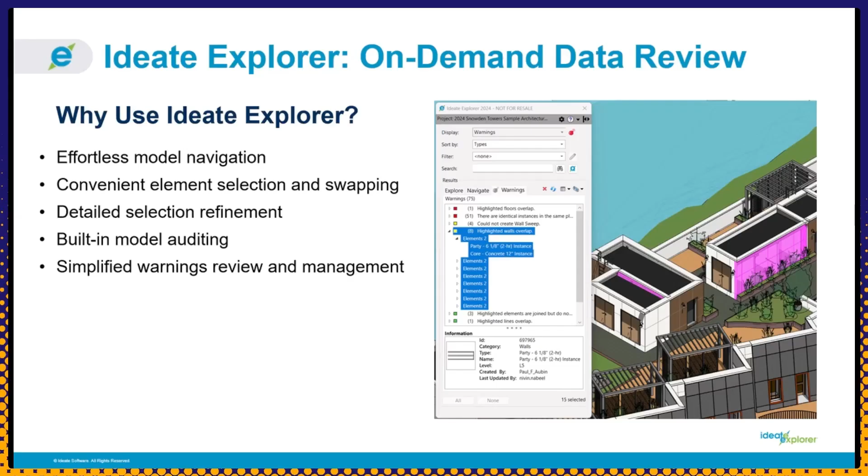The warnings are all ranked as well. They can be customized, so the most important warnings surface to the top and the least important warnings are pushed to the bottom. And the rankings are included in those Excel exports. As a BIM lead on my project at HOK, Ideate's query-based search helped me support my team's needs faster and gave us a lot more confidence in our models, really. And I will show you how that works in an upcoming demo.

Let's talk about Ideate Style Manager. So Ideate Explorer is really great for auditing model elements, but what about all the styles behind those elements, right? So in Revit, every 2D and 3D element is tied to things like object styles, line styles, materials, fill patterns, etc. And managing all of that manually can be a real mess. So that's where Ideate Style Manager comes in.

It gives you a clear view of where styles are used across your model and even within families. Once you identify what's in use, you can merge styles or delete unused styles, duplicate styles to align everything within your BIM standards. And so the result is a cleaner, more consistent Revit model that's easier to manage and share. We'll walk through how this works in just a bit, but know that Style Manager is a really good companion to Explorer when it comes to keeping your models under control.

Now let's talk about Ideate BIMlink. So BIMlink gives you the power to manage massive amounts of Revit data fast. It allows you to export parameters and properties to Excel, where it's much easier to review and make edits. And once you're done, you can push those changes right back into your Revit models seamlessly. So let's be honest here. Revit schedules are powerful, but they can't match the flexibility of Excel, as some of you can imagine.

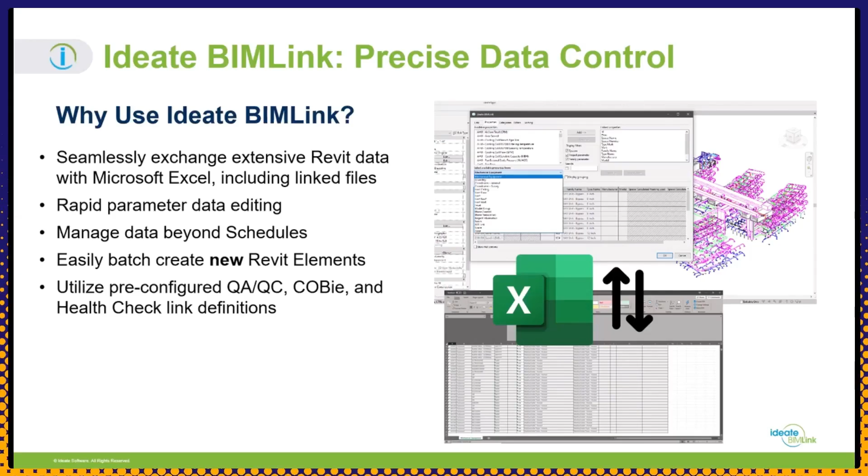Ideate Sticky. So Ideate Sticky lets you bring non-BIM data into Revit quickly and cleanly. It is different from BIMlink in the sense that it will not impact the elements in your model, but you can link Excel, Word, or PDF documents directly into your model while keeping their native formatting and visual fidelity intact. This is perfect for things like sheet specifications, code lists, code studies, notes, and any other reference info that needs to be visible and always up to date.

And instead of creating this content manually in Revit, Sticky keeps it synced and looking exactly how it should. It's a simple but really powerful way to ensure that critical non-BIM data stays a part of your project without breaking your workflows. And we'll show you how easy it is to set up during a demo.

Ideate apps. What are Ideate apps? Ideate apps are a collection of tools designed to handle the repetitive and time-consuming tasks we all face in Revit, right? So instead of spending hours on things like renumbering, finding hidden elements, placing views on sheets, Ideate apps helps you do it a lot faster, a lot more accurately, and with a lot less frustration. It's made up of 10 focused tools, each one built to solve a specific pain point. So whether it's checking spelling, safely deleting elements, or managing views and sheets more efficiently, all of these tools are built to help you with those tasks.

The real power here is how much time and energy you save across a project. It's not about working harder. It's about working smarter and making your Revit experience smoother every step of the way. So we'll show you a few of these tools live so you can see how much of a difference they can make in your regular workflows.

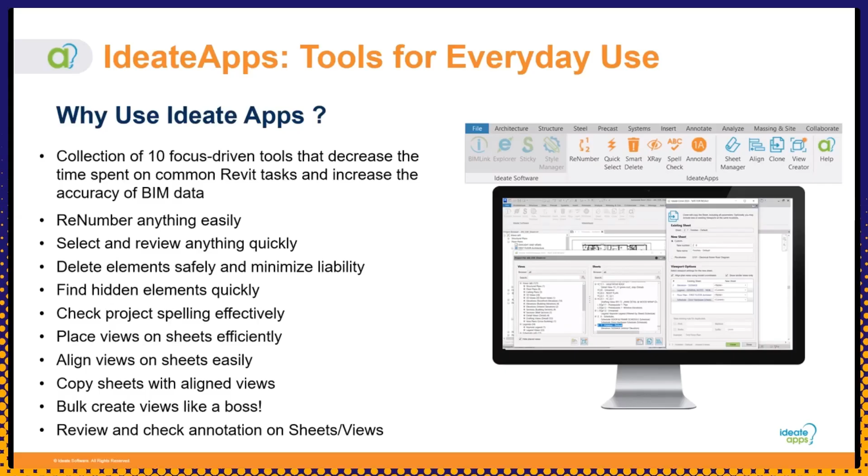Let's jump into some demos, starting with Ideate Explorer, and specifically how it can help with navigating through your model. Ideate Explorer provides you a high-level view of all the items within your Revit model, along with other helpful information like counts and properties. Additional filtering and sorting options at the top allow you to explore the model in a really detailed manner. So for example, you can choose to view everything in your model, narrow it down to the current view you're in, or create a list based on your current active selection.

For more precise control, you can layer on a sorting condition where you can organize items in the list by category, level, room, space, etc. And additionally, you can also apply Ideate's pre-built filters or custom filters that help you narrow down exactly what you want to see.

So in this example, we're going to look for a specific window in the project. And by expanding the list, we can narrow down to a specific type of instance, and double-clicking the instance will open a view showing the element.

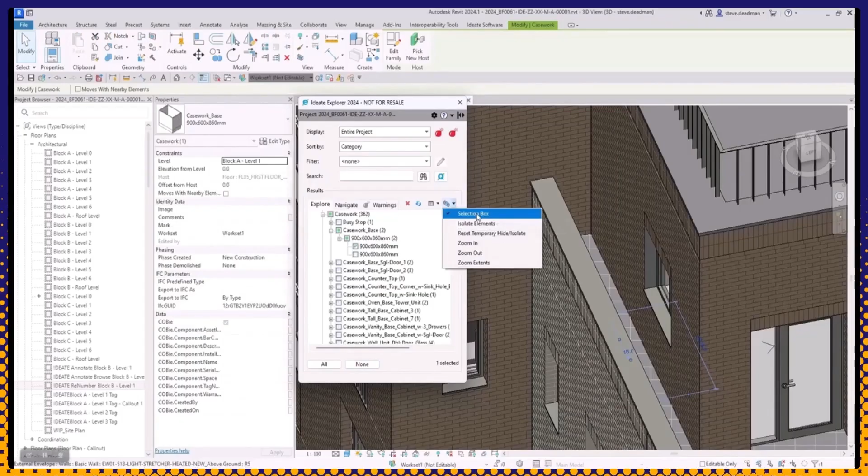In this case, we are looking for a specific piece of casework in the model. It's inside the model, so double-clicking on it will not show me the exact piece. But what I can do is I can create a section box around the item. So it'll actually create a specific view that is cropped to see exactly what you want to see. It's a super easy way of narrowing down your view without spending time searching for a specific item.

Let's look at how you can leverage one of Ideate's built-in filters. With Ideate Explorer open, I start by selecting the pre-built Ideate Audit filter. We can see that in the list, there are items that may be impacting the performance of your model, such as CAD and PDF imports, lines and groups, etc. Let's look at a specific import that seems to have been brought in twice in the model. So in this case, it will be a CAD import.

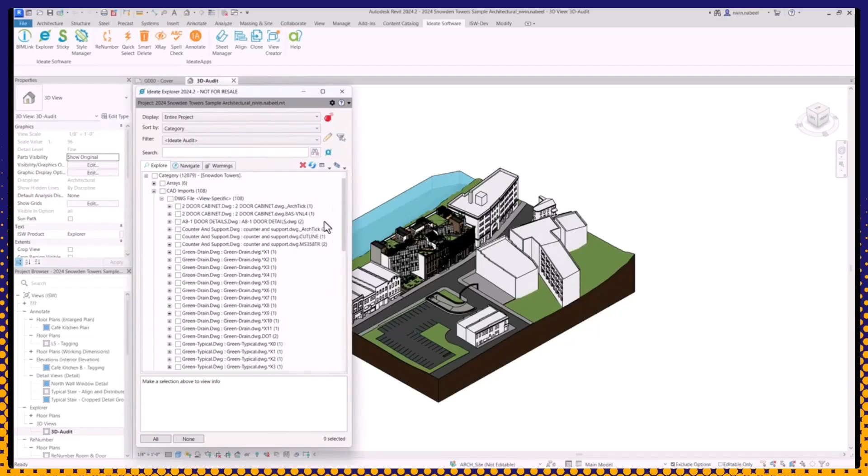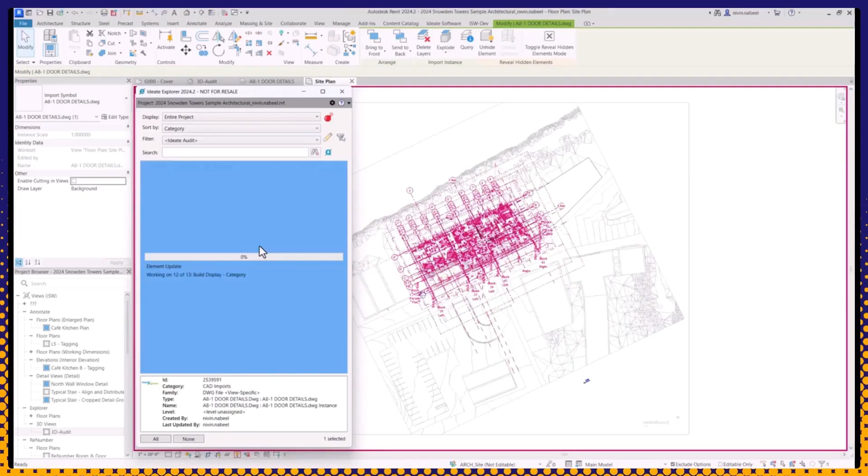On expanding the import, you can see that there are two instances in the model. So by double-clicking the first, it opens a view where the import has been placed. There's nothing special here. So let's look at the second import and see where it has been placed. And it looks like this element has been hidden. Ideate Explorer will actually go to the view and unhide the element for you. And there you go. It looks like the DWG has been imported in the site plan.

And at this point, you can click on Ideate Query to investigate more details about the instance and search for specific properties of that instance. So for example, you can look for who has created that particular instance, and it'll give you more insight into that specific element.

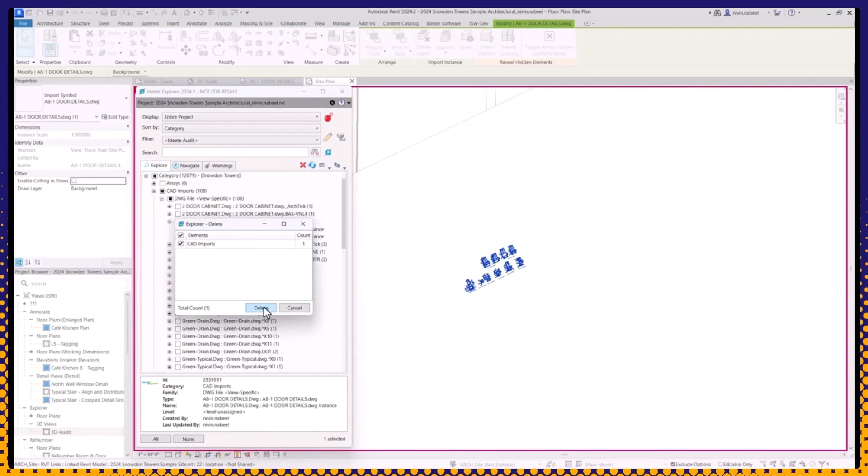You can also view groups in the Explorer as part of the list of items that can be audited. Really helpful in an example where detail lines are used within a group. By checking the box next to the instance in Explorer, you can select all the instances of the group in the model. And upon editing the group, you can choose to use a detail component instead of detail lines.

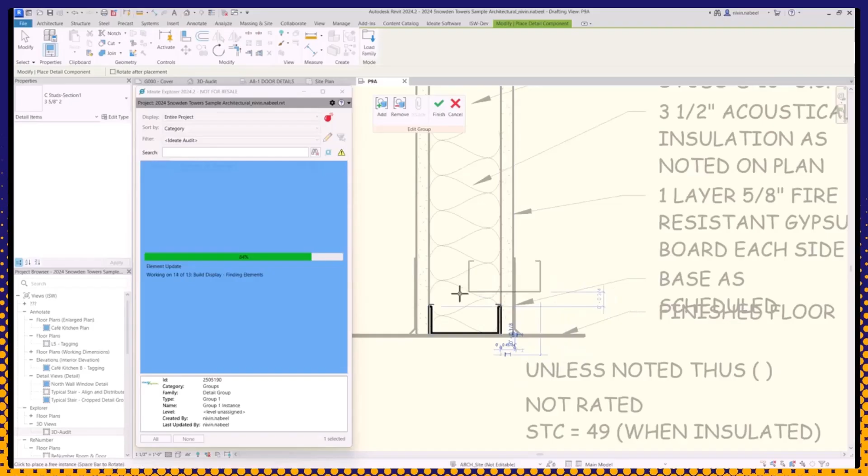So I'm going to go ahead and double click this particular group and replace it with a detail component. And once you place the component, of course, you can go ahead and delete those lines. And once saved, you can see that the group has been updated everywhere. And so again, this is a quick and easy way of trying to clean up your model versus an ad hoc exploration of the model to fix issues.

Let's talk about lines really quickly. Ideate Explorer groups line types and instances into detail lines and model lines. Again, you can see the line type and count in Explorer, and expanding a type will show you all the instances of the line in the model.

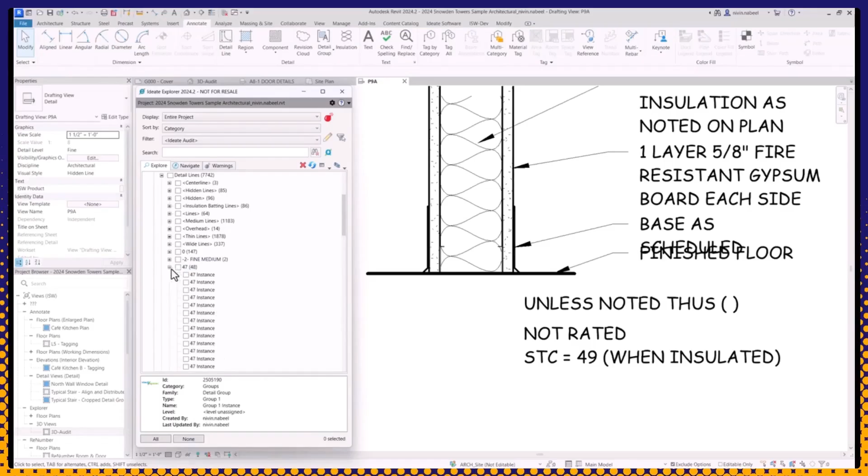So in this example, you can check the box next to the line type, and they actually get selected in the model. Similarly, you can also select other non-standard line types. So I've selected a couple here, and then you can change all of them into a specific line type that aligns with your business standards.

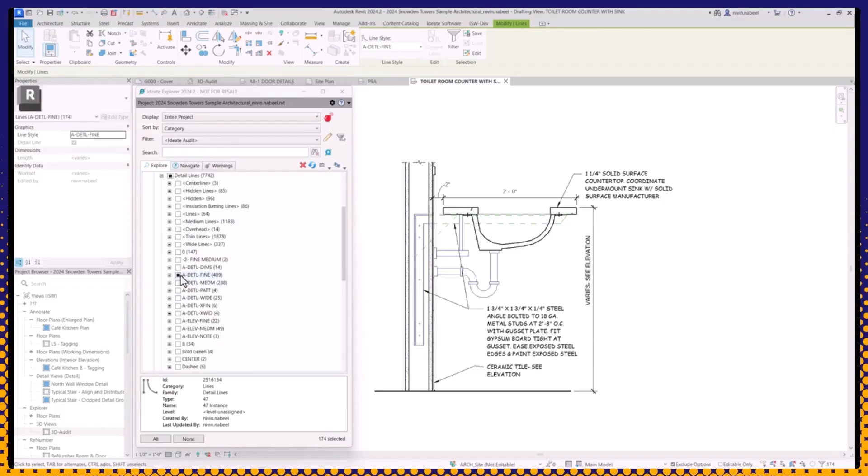Something that makes Explorer unique and powerful is dynamic filters. When you have Explorer open, you can see a list of everything that has been built in the model. So let's say as part of the model review, you want to look at in-place families only. With filters, you can narrow down the list to multi-category in-place families as shown here. You can see the different types of families in your model that match that criteria.

Now let's look at how the filter is set up. You can also create your own rules for the filter, by the way. On the list on the left, you can see the different categories of elements in the model, and several of them have been checked. You can also view and edit additional conditions on the right. And in this case, we are saying that the value of the Is In Place parameter is equal to true. Now, this is not a Revit property, which means that you can use custom parameters as filters as well.

Now, what can you do with this list? By checking all of them, you can now isolate the items and go through your cleanup or auditing or design process. You can quickly replicate instances within the model. And as you can see, the count against that item goes up in Explorer. So that's what we call dynamic filtering.

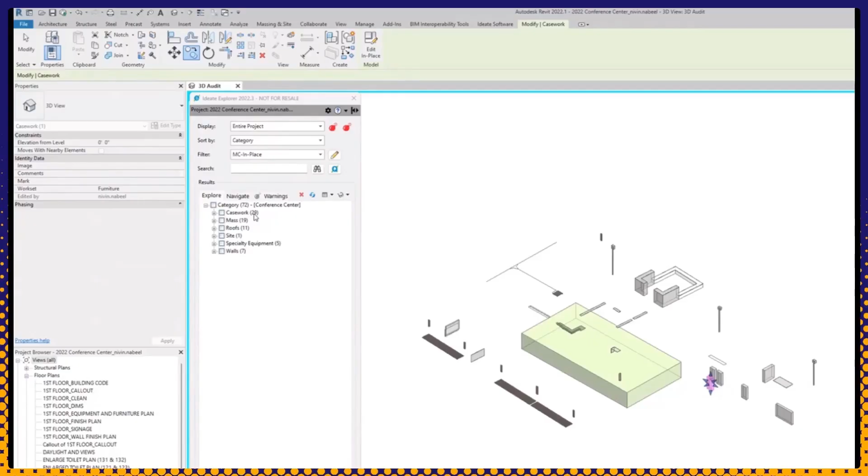Let's talk about how you can leverage sorting in Explorer now. So sorting is a powerful way to group model elements based on their properties, so things like worksets, levels, rooms, spaces, and more. Here is an example of items sorted by level.

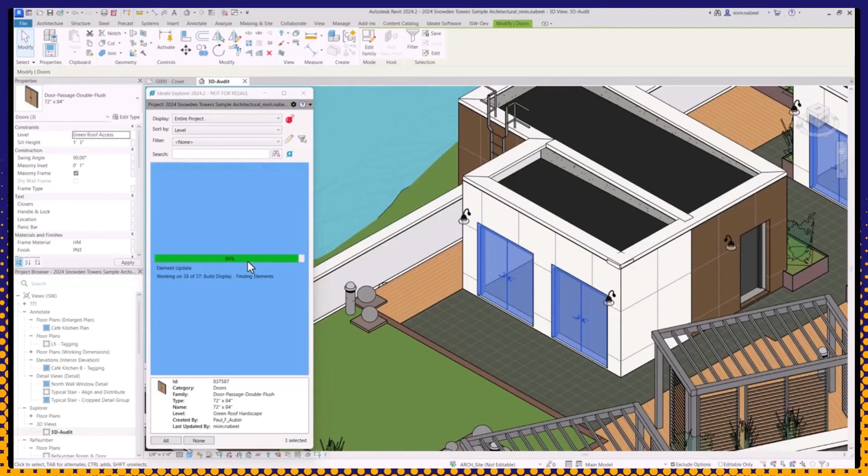So while looking through the list, you will note that there are doors that are not on the correct level. I know that there are no doors supposed to be on this level. So you can select them and quickly move them to the correct level from the properties drop-down menu. You can see how the doors have now moved down to the correct level.

Now, as an example of our tools and workflows working seamlessly together, sorting is particularly helpful when used along with filters. So for example, if your task is cleaning up worksets, you can first sort all the elements by worksets. In this case, you select the entire workset. The workset selection will be grayed out because you're selecting elements and groups that are non-editable.

When you layer on a pre-built multi-category editable workset filter, you can select the individual items within an editable workset, so you can move them to the appropriate workset. If you're trying to clean up your model and make sure everything is in the right workset, you can use Explorer with sorting and filtering to do this really quickly and accurately without having to navigate through the model and checking each element one at a time.

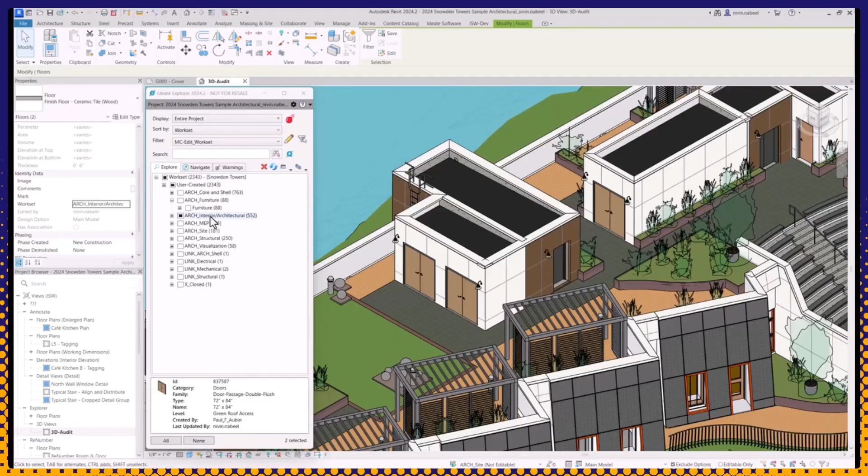One last example of Ideate Explorer is the Warnings Manager. The Warnings Manager is built into Ideate Explorer. The default Revit Warning Manager is pretty overwhelming, which is why we've built our own tool. With the Ideate Warning Manager, you can also customize the order in which warnings are listed and rank them however you want.

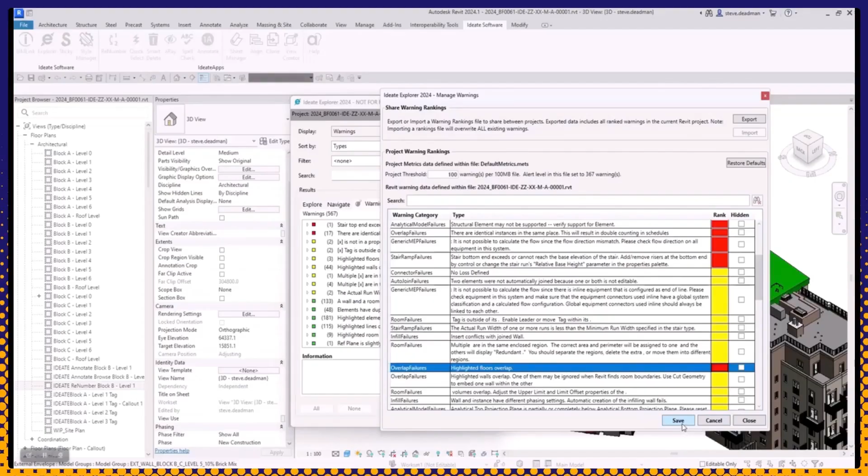So in this case, let's say you have a floor overlap, and you can manually toggle that to a high priority example. So I'm going to go ahead and scroll to that particular example and change the rank of that specific condition to high. And just as an example, that actually shows up in the Warnings Manager as well in Explorer.

Now let's look at the specific stair warning. You can choose the warning and create a section box around that specific element included in the warning. So you're viewing the issue in contextual detail, and you can then address the issue. So it really allows you to zoom into the problem area and take action based on what's happening in the model.

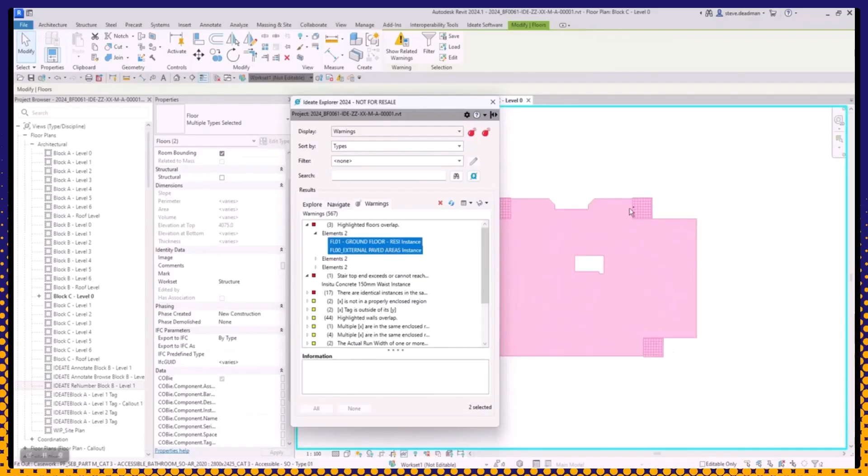Now, in this case of overlapping floors, Ideate will take you to a view that shows you the condition. With the elements then selected, you can isolate them, view the overlapping condition, address it in the active view, and then go back to the warnings list. And once you've updated that, the warnings list will be updated as well.

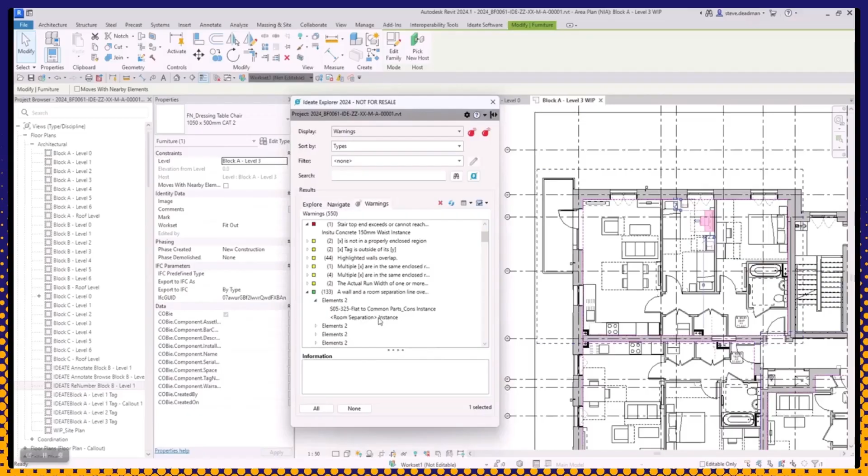Now let's look at another warning, which says that there are identical instances of elements in the same place. So it looks like someone may have accidentally copied a set of elements in the same location, creating an overlap. There may be annotations and tags associated with the original items, and you may not want to lose them. So Ideate will allow you to retain the original items or the latest items, making it easy to delete unnecessary copies. If you just discovered the issue, you can delete the latest elements and all the original elements and the other dependencies stay in place.

And in this case, we're looking at room separators, which can be really hard to find, especially if it's placed under a wall or location similar to that. So Ideate allows you to quickly locate and select the separators, and then you can modify them, saving you time and having to find them manually.

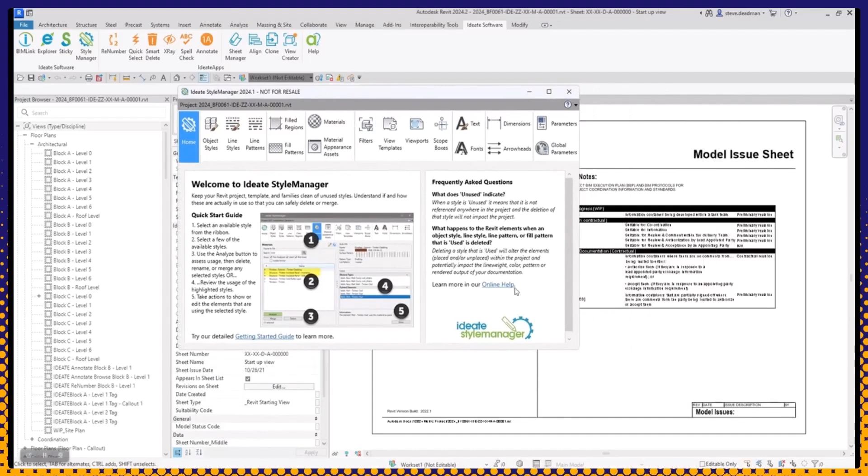The concept behind Style Manager is fairly straightforward. It is a hub that allows you to manage styles in the model across different items, things like objects, lines, patterns, regions, materials, etc. When you select a certain type of item, Style Manager shows you a list of all the different types under that item. Items that are colored are duplicates, in case you're wondering what those colors mean. Now let's, as an example, browse through line patterns.

One way to use this tool is to clean up imported CAD line patterns. You can see duplicated imported line patterns here.

To effectively use this tool, you must first analyze the items in the list. After you analyze an item, you'll see the count in the column on the left. If it says 0, the pattern isn't being used anywhere and is safe to delete. The tool allows you to safely identify items in use before you delete them.

Now in this example, you can see two patterns which look like they're the same pattern with different names. You can see what this pattern looks like on the right. When you select the items, it will list the locations where they're being used.

You can also merge patterns once you review the usage and have identified them as duplicates. When you click on merge, you can select the base pattern you want to keep, as you can see here. So now you can go back to the merged pattern and rename it to match your project or BIM standards and make it easily identifiable.

You can also analyze materials being used in the project. On analyzing a material, you can see a lot of information right in the window, like style info and where the material is being used. You can also analyze and merge materials using Style Manager this way.

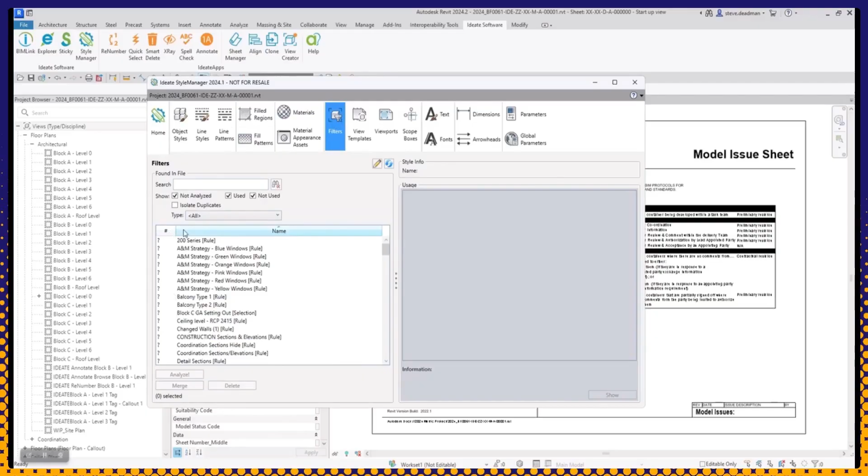Style Manager also works the same way with filters. You can identify where filters are being used and quickly audit which filters are redundant and can be deleted.

Style Manager can also help you with family and project parameters. When you fire up the tool, the tab is available on the right-hand side of the window. On clicking it, the tool reviews parameters in project title blocks first, because they're in labels and are hard to find.

You can access the search bar at the top, or narrow down the parameters based on whether they're project or shared parameters. You can also highlight and isolate duplicates, analyze them, and then delete them if needed.

Now, in this example, I'm trying to search for a specific parameter called acoustic rating using the search bar at the top. On clicking Analyze, the tool will list all the details of the parameter. But you'll notice that while there are no instances found, there's also a question mark in the count.

That's because the initial analysis is quick. You can choose to run a deeper analysis as well and take it a step further to analyze the use of the parameters within schedules and title block families.

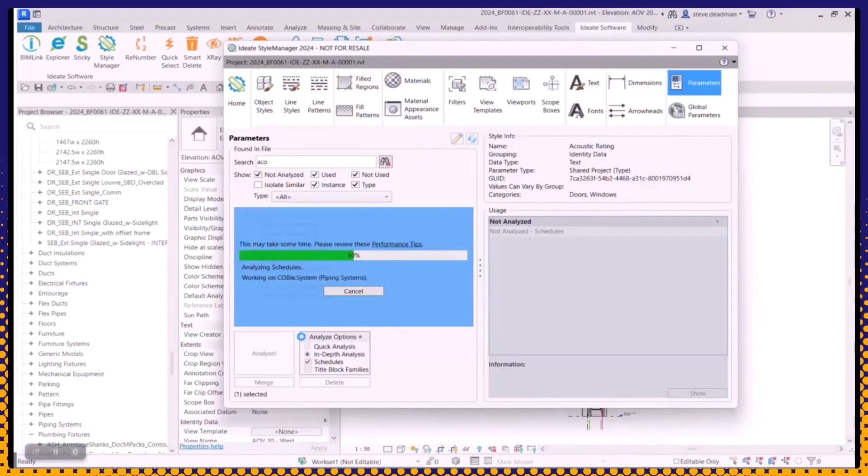Now, when those options are checked, you can see it takes slightly longer for the analysis to run, but Style Manager is able to pull up the schedules where the parameter is being used within a family.

Now let's clear the search and browse through the list for some duplicates. I'm going to analyze these two parameters that are duplicates, and when I do it, you can see that the first parameter is in use in two locations, but the second one is not.

Style Manager also provides you with additional context about the usage, so you can see where the parameter is being used. Once you've reviewed all this information, you can safely delete this parameter, knowing that it will not affect anything else in the model.

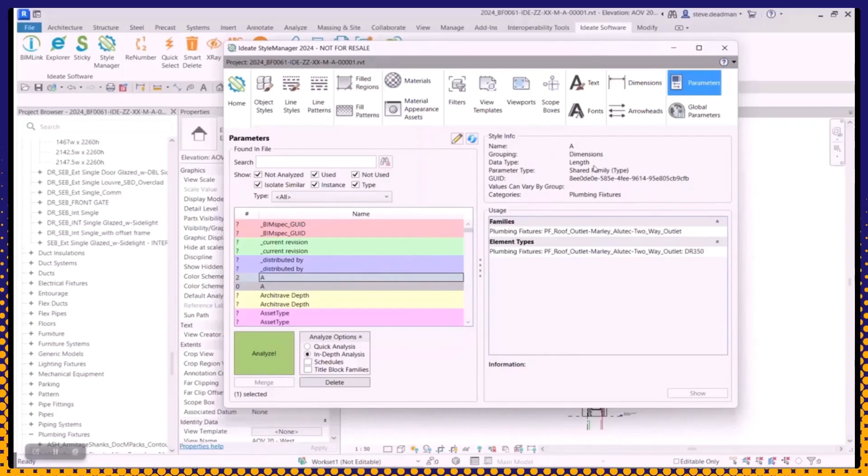Moving on to the next tool, which is Ideate BIMlink.

BIMlink is a powerful tool that allows you to export data from Revit to easily manage and edit properties and parameters in large sets. Think door schedules, wall types, sheets, and the like.

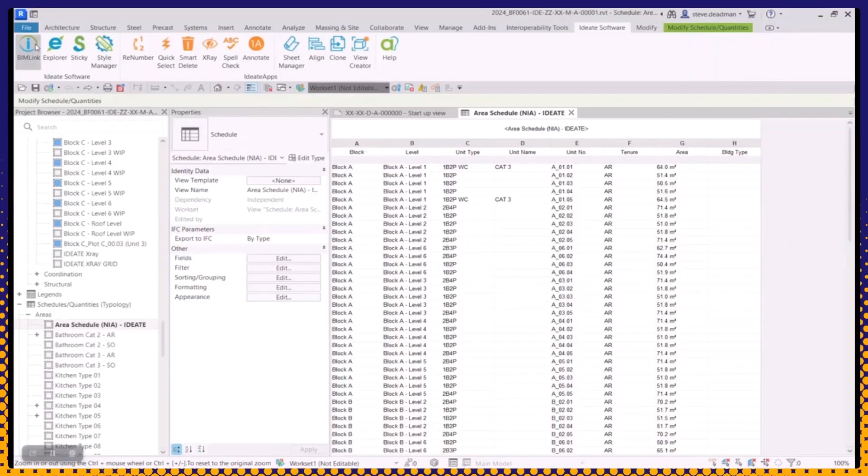This data is collated by creating what is called a link definition. On opening the tool, you can see that I already have link definitions set up in the model. So let's talk a little bit more about what that means.

When I click on New, it'll bring up a new window where I can start defining exactly what information I need collated. BIMlink ships with a couple hundred pre-built definitions. You can see that these are saved in your local Ideate installation folder, visible here on the left.

When using BIMlink, you can search through these to narrow down what you're looking at. You can include subfolders within the primary search as well. You can collate data beyond just schedules, or by specific discipline like architectural, MEP, or structural.

As an example, let's say I want to create an exportable Excel file with door types in the project in an organized manner. You can use the Edit Door Types link. Anything here that is in white is editable. So let's take a look at the doors themselves by using another pre-built definition called doors.

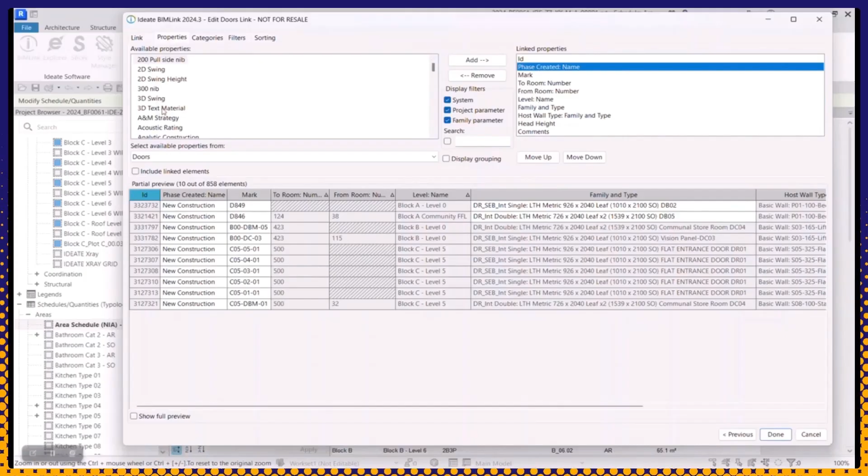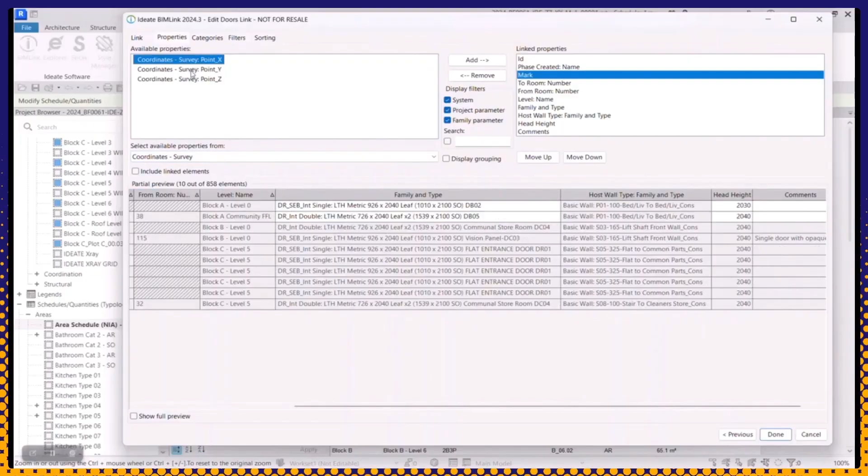Much like a Revit schedule, you can add and remove properties to the link definition, and BIMlink will collate the information as needed. You can also look for related data tables, not just specific element properties. So in this example, you can look at host walls, door location coordinates, fire ratings, etc. You can add any information to a table that will help you parse through all the data, but also make bulk changes to Revit elements outside of Revit and bring those updates back into Revit.

We also have several pre-built BIMlink definitions that you can use to create Revit elements, things like views, sheets, parameters, health check definitions, and project standard definitions.

In this example, you can see that I've created a list of floor types in the Revit model, and I can easily edit properties for types that appear in the list simply by typing in information into open fields.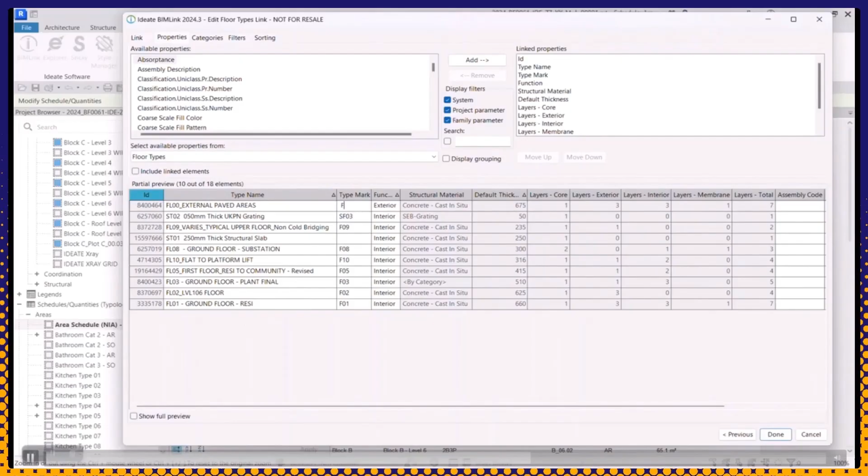Here's a list of quality control definitions that come pre-populated as well. You can control family naming, manage work sets, project parameters, view templates, and a lot more.

Now, sheet revisions is a very common use case for BIMlink as well. You can export sheet lists out of Revit, make changes in bulk, things like revision numbers, issuance information, names, etc., and bring that data back into Revit, and it will push through those updates across the board without you having to do it manually.

Material management is another common use case. You can use BIMlink to make bulk changes across your model without having to go through the entire model manually. You can change materials, wall layers, and the like. In this case, I'm changing the finished material for a specific wall type in this list of wall types, and this will update the wall type across the project. I do not have to edit every wall manually to do this.

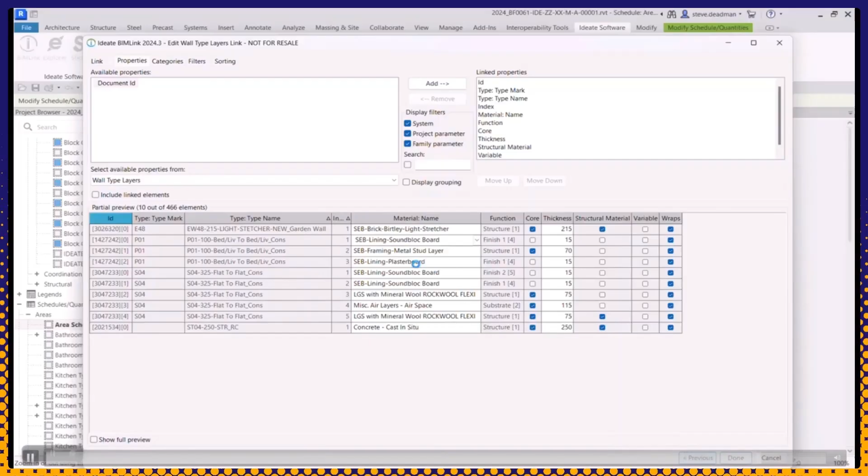You can also create BIMLink definitions by category. So in this case, we want to analyze air terminals in the project and create an exportable file. BIMLink will allow you to pull in any associated properties with that element to make it easy for you to export the data.

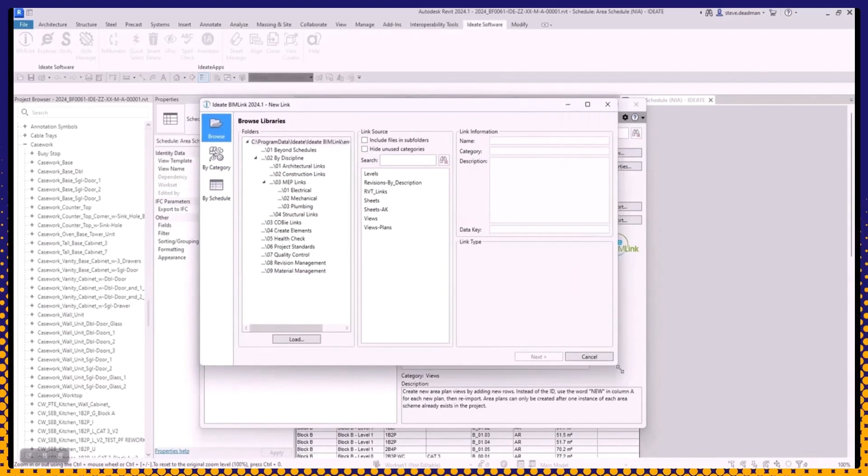BIMLink can also be used with model schedules that you have already created. You can choose to export existing schedules without using Ideate's pre-built definitions, so it is really flexible and customizable in the way you want to use it. In this case, you can see an existing area schedule from Revit being defined in BIMLink with all the header information intact, and you can add additional columns to it without impacting the schedule that already exists within the model.

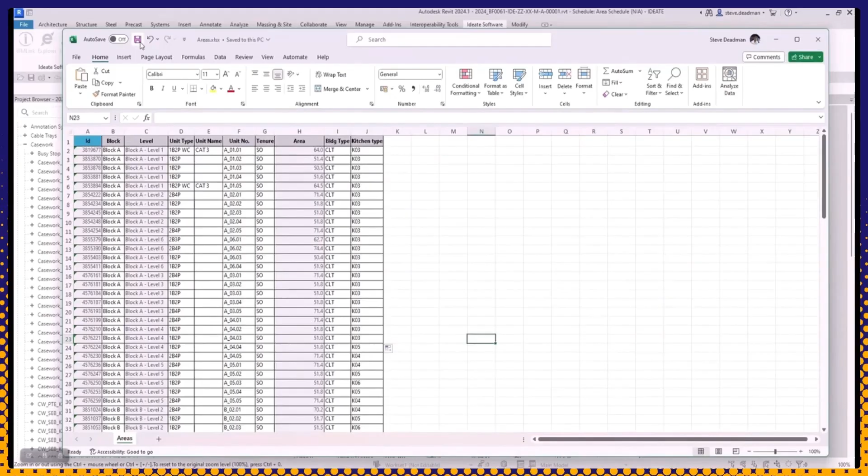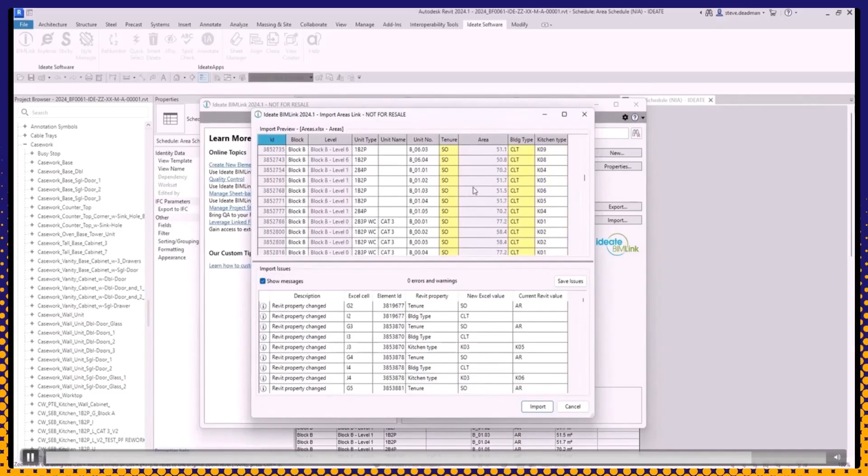You can then export the schedule as an Excel file and open it, and you can see all the data here. All the fields in white are editable. Let's make some changes to the information in Excel by dragging some fields down to populate the table. You can use Excel as you need to modify item data, and you can then import the Excel file back into the model. On importing, BIMLink shows you a report where it highlights items that have changed before you actually run the import. Once you do that, you can see all of the updated properties in the area schedules.

BIMLink is not only helpful in editing existing elements, but is also a really powerful tool you can leverage to create new elements in your model. We have quite a few pre-built definitions that you can use, as you can see here, to get started.

When you open BIMLink, click New. You can see all the pre-built definitions here and browse through the Create Elements folder and narrow down the list using the search bar at the top.

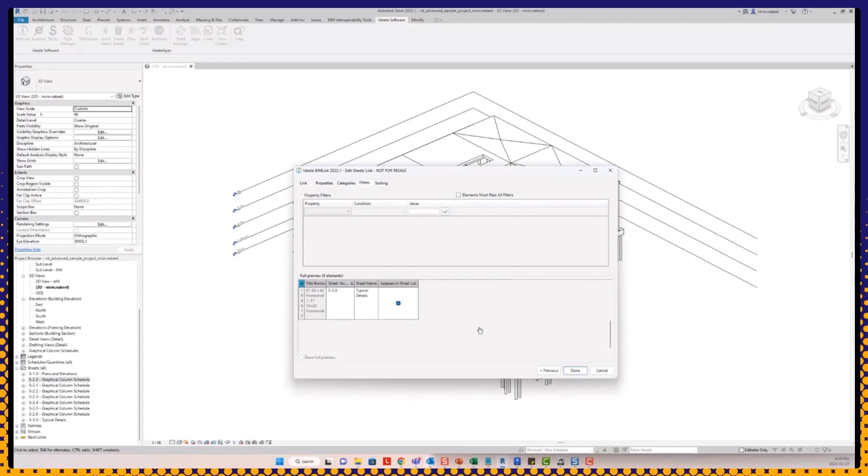When you enter that definition, you can see that there are predefined properties that you need to create sheets. It looks like there's a filter on here, so you can remove that and you can see all the existing sheets in the model. You can then export the file and open it in Excel.

We ship our product with a project setup template, and that is what you see on the right. On the left is the Excel file we just exported. With Excel, of course, you can set up conditional formatting and filtering and sorting.

So if you have a large set of sheets, you can freeze the header to make that easier to browse. The Excel file that is shipped as a sample file with BIMLink has different tabs set up for creating new levels, plans, sheets, viewports, etc.

What's important to note is the ID column on the left. If it says new, that element doesn't exist in Revit yet and will be created upon import. Within the template, the sheet name is a formula that allows it to match the view name placed on it. So you can set up all of this without even opening Revit.

We can copy over the sheets we need to be exported into the Excel file and then populate it as needed. I'm going to use the title block in the model and copy it down to all the sheets in the Excel file, and change this value to true so all these sheets show up on the sheet index.

If there is no title block selected, it will create a placeholder sheet. It's really great for things like creating sheets for consultants that will show up in the sheet index.

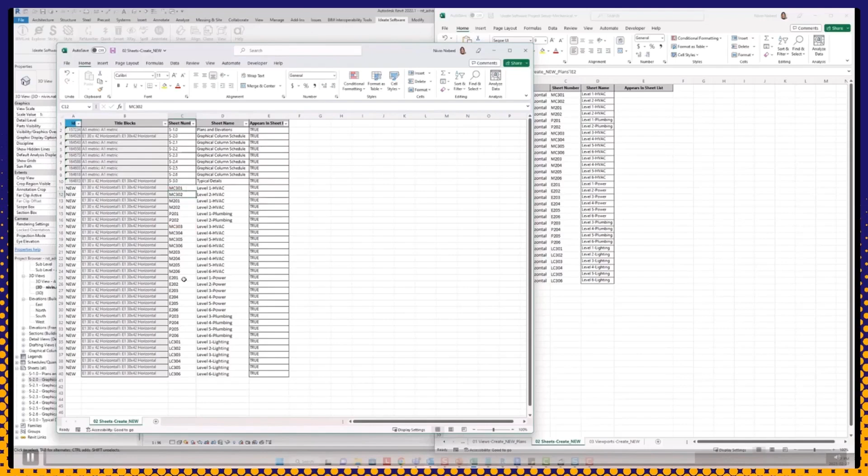You can use filters in Excel to highlight any duplicates and fix them prior to import, as you can see here. BIMLink will of course highlight this for you before importing, but it's a good way to catch some errors upstream.

On importing the file, you can see all the new sheets being highlighted with no errors, and just like that, all the new sheets have been created.

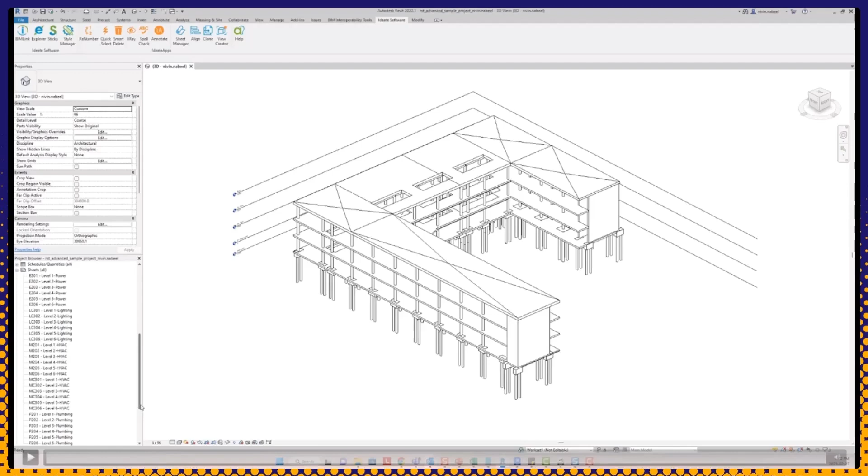Material quantity takeoff is also possible using Ideate BIMLink. Whether you're tracking embodied carbon, producing estimates, or sharing data with colleagues who don't work in Revit, this functionality will help streamline collaboration and reduce reliance on manually opening large models.

The Material QTO sample link definition under the Material Management folder in BIMLink introduces a new data category, giving you more flexibility and detail than what's typically available even beyond Revit tools.

This feature enables you to export detailed material quantity data such as area, volume, and type directly from your Revit models into Excel. So while the data itself isn't editable, having quick, reliable access to it is incredibly valuable for a lot of project workflows.

Ideate Sticky is a really popular tool that allows you to bring in non-BIM data into Revit. You can bring in Excel files as schedules or images, or Word or PDF files as well. Using Sticky is pretty straightforward.

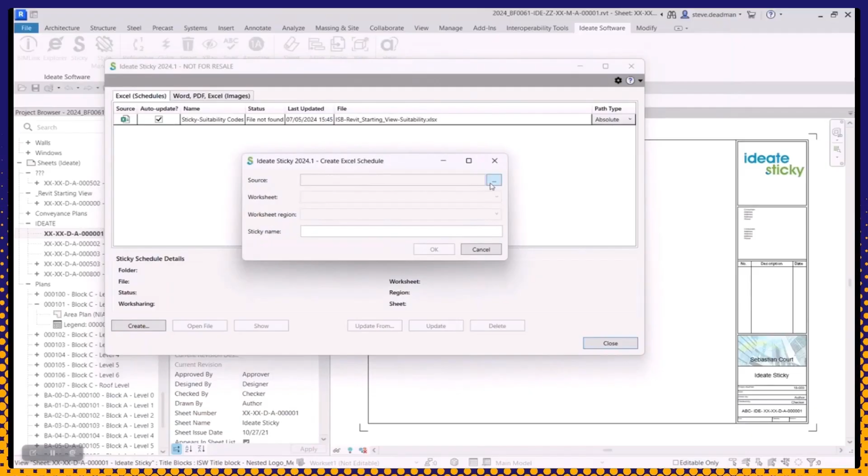When you are in the Excel tab, you can click Create and create a new sticky schedule. You can link in the file you want to bring in, lighting specifications here as an example. You can also select the worksheet and the region within the Excel file, so it imports just that.

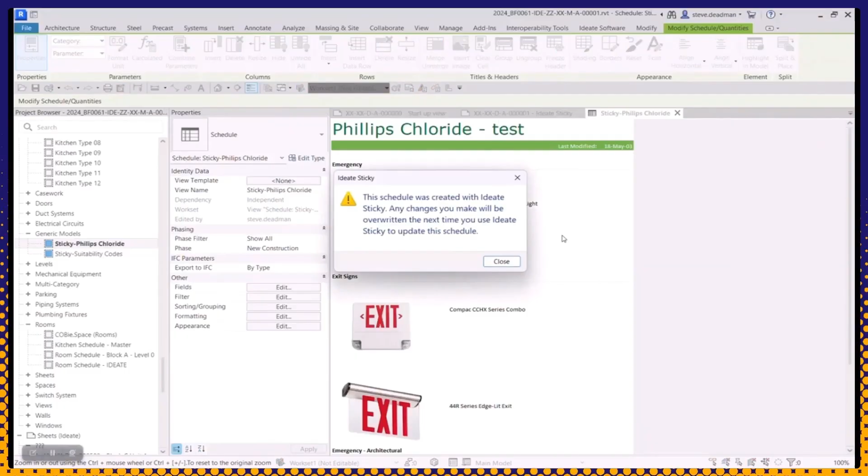The sticky is placed as a schedule on the sheet and is also listed as a schedule in the project browser. Sticky is populating all the information under the schedule header. So when you select it, it looks like a schedule under properties in the project browser.

And if you try to edit it, it will show you a pop-up letting you know that it's a sticky. You probably only want to edit it in Excel in the original location for it to be a single source of truth.

If you don't want to bring it in as a schedule, you can bring the information in as an image. So you can link the same file in as an image, and you can look at what you will be bringing in. It looks a little different from the schedule because of the translation tool that we use.

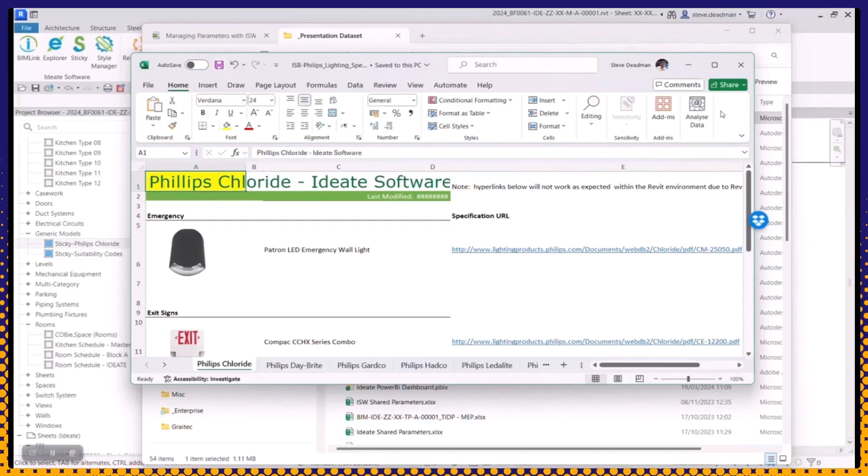Now let's say you want to edit the Excel file, change the name for example, and the background color. Save and close the file and go back to Sticky in Revit. You can see the auto update checkbox here, and that updates the file the next time you open the model. For now, you can click on update and that will refresh the information, and you'll see the updated information in Revit with the name change and the background.

This is also a great tool to bring in things like specifications in Word and pulling in certain sheets from a Word document. You can see that workflow here where you can select certain Word pages and paste the sticky onto your Revit sheet. Let's hop into our last suite of tools for the day, which is Ideate Apps.

And specifically, let's start with the Renumber tool. Ideate Renumber allows you to quickly and smartly renumber different items like doors, grids, furniture, etc. in your entire model. In this example, let's renumber rooms in this view. There are fields that allow you to control how the numbering system works and different methods by which you can renumber the rooms. In this example, we will choose to renumber elements by vertex.

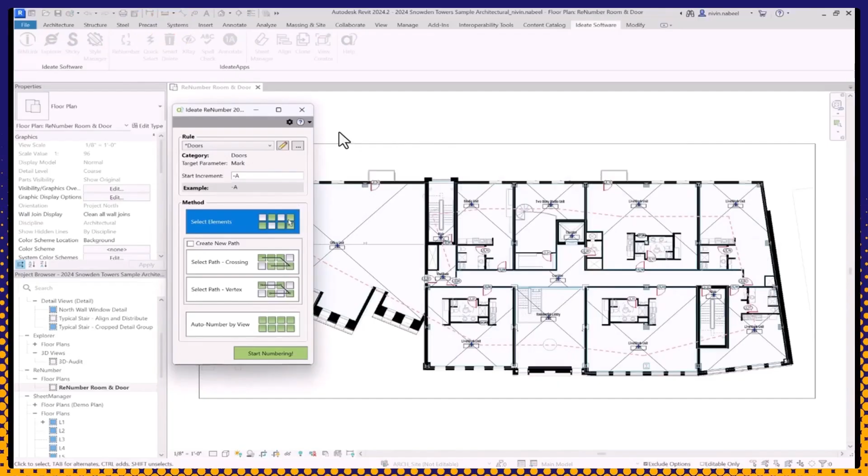On drawing a line and adding vertices on top of rooms, you can renumber them in the order in which you place the vertexes. It will show you a preview of the changes before they are pushed out and allow you to do things like ignore certain rooms, as you can see here. Now, when you zoom in, you can see that the room numbers have been updated and ignored rooms have not been updated. Let's open the tool again and renumber the doors by view.

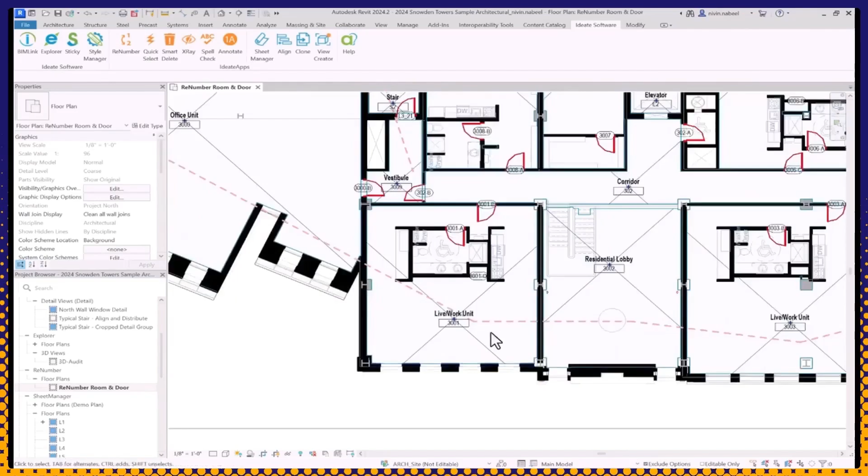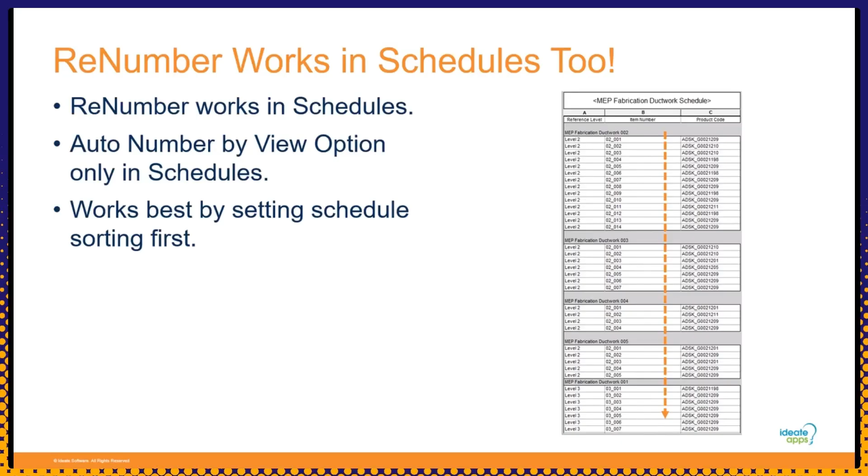Instead of selecting each door individually, you can choose to auto number the doors showing on this plan. Also, to allow you more control, you can swap the to and from room so that the numbering aligns with the view instead of going to each door and doing it manually. You can choose to add a suffix as needed to help identify the doors as well. It will also renumber doors within groups. Another amazing feature of Renumber is that it also works in schedules. So you can sort elements in a customized way before running the renumber process.

Let's talk about Smart Delete, which is another tool that lives within the Ideate Apps suite. I'm going to pull up the warnings tab under Ideate Explorer that we spoke about a while ago. Let's look at the example of multiple instances of elements on top of one another. Let's say you discovered this issue later in the project, so you can't retain original or retain latest because the elements may have been tagged in some other view that you don't know about. This is where Smart Delete is most helpful.

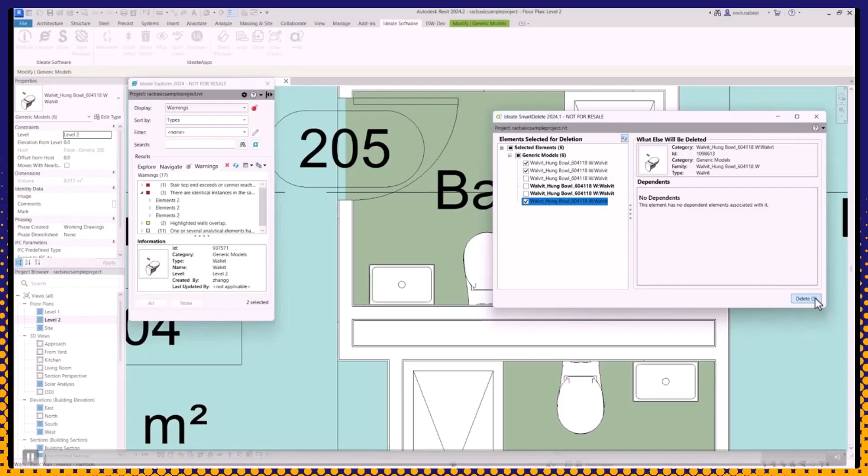Smart Delete will tell you if the element has been annotated anywhere, which is dimensioned or tagged in any other view, and if the element is safe to be deleted. So here you can see that elements that have been bolded have dependencies. If you double click on the element, it will take you to the element in an active view. You can review the elements by their element IDs and also confirm that they are duplicated in place, and then delete the redundant ones. This will also update the warnings list in Ideate Explorer.

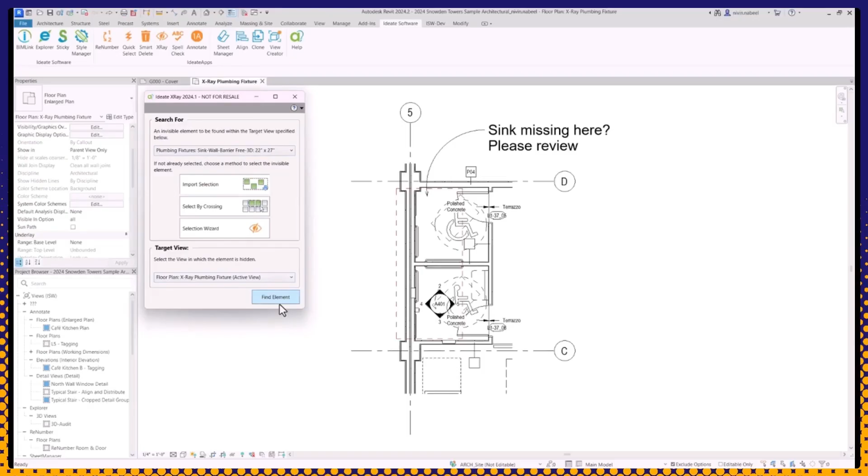Next up is Ideate X-ray. How many times have you been in a view trying to figure out why a certain element or tag is not showing up? Ideate X-ray allows you to identify the missing element in an intelligent manner. You can choose to select an area, and X-ray will list all the items within that selection box. In this example, you can see that the toilet fixture or the sink is missing, but it shows up in the list in X-ray. You can choose the element and run an analysis on it. X-ray parses through 50 different visibility conditions, and it tells you why the item is not visible.

The results are also ordered in a specific hierarchy. The ones at the top of the list need to be addressed first before the results below it. This hierarchy is important. So in this case, you can see that the workset is not open, which you can then fix. Once that is done, you would go to the next solution, which is the view template. For some, you can click fix and X-ray will fix the issue for you depending on certain conditions. In this case, that is not possible, so you'll need to check or fix the view template manually.

Now the element is still not showing up. So here it is hidden by element, which isn't a great way to hide things, but people do it anyway. Once you know, however, you can fix it manually, and that's what X-ray allows you to do.

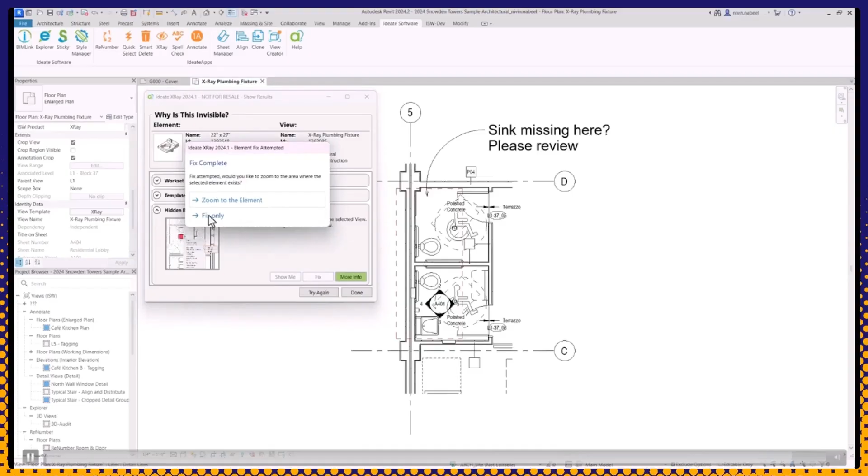Next up is Ideate Annotate. Ideate Annotate is a really powerful tool that helps you manage annotations in your model. It's like Explorer in the way it works. It not only helps you browse through annotation elements, but also helps you review and fix annotation issues like zero-length dimensions, clashes, blank tags, orphan tags, duplicates, etc.

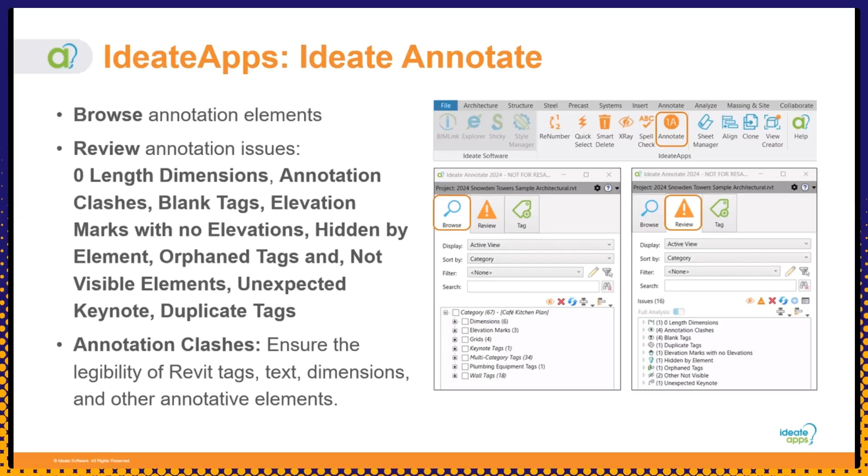Anything that makes your model busy and cluttered. It also flags annotation clashes, which is a big issue, making sure that your tags are legible. This is an overview of the issues with annotations in this model. Double-clicking the tags will take you to a view where those tags are visible. You can see the overlap here and modify it to avoid the overlap.

You can also set thresholds for proximity of tags and dimensions and set that as a trigger for warnings. So here's a blank tag and you can delete it from Annotate. You can also dismiss issues if they're not important. If something is not visible in the view that you're in, you can also run X-ray and it'll bring up the X-ray window with possible solutions as we spoke about previously.

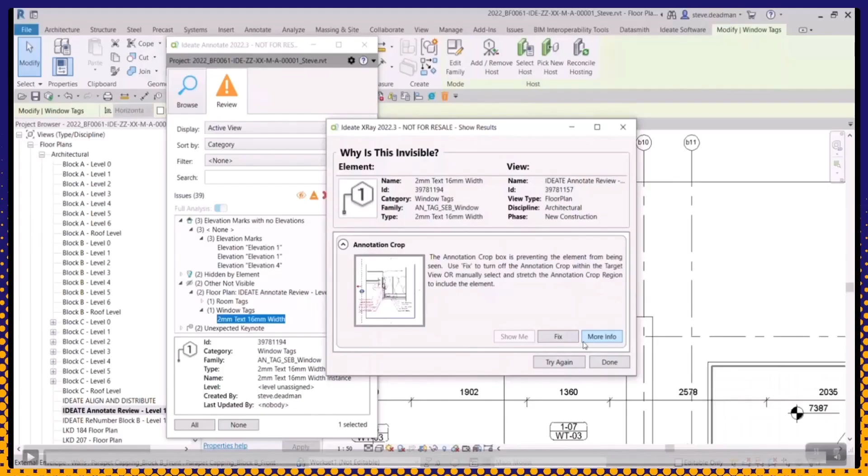Ideate's sheet management tools allow you a lot of control over sheets and views in your model compared to the out-of-the-box Revit tools. In this example, this project is large, and so you want to break it up into zones and track that across sheets in the model. So let's go ahead and open Ideate View Creator. Let's say you already set up the zones on one level and want to copy this across the other levels.

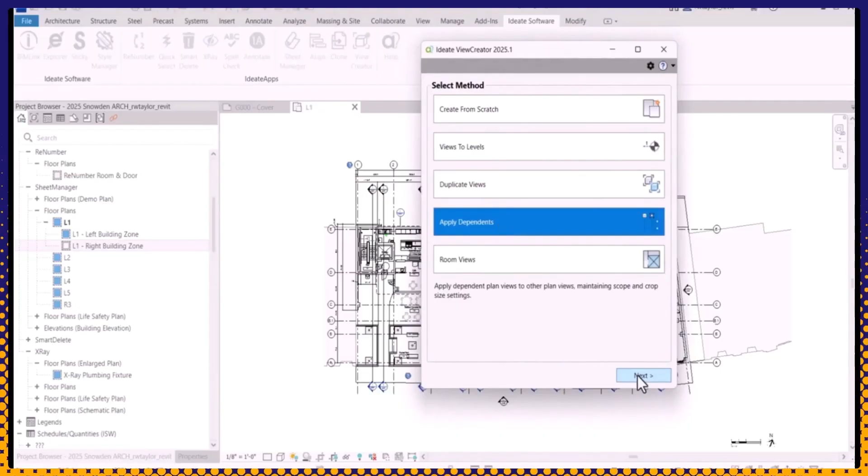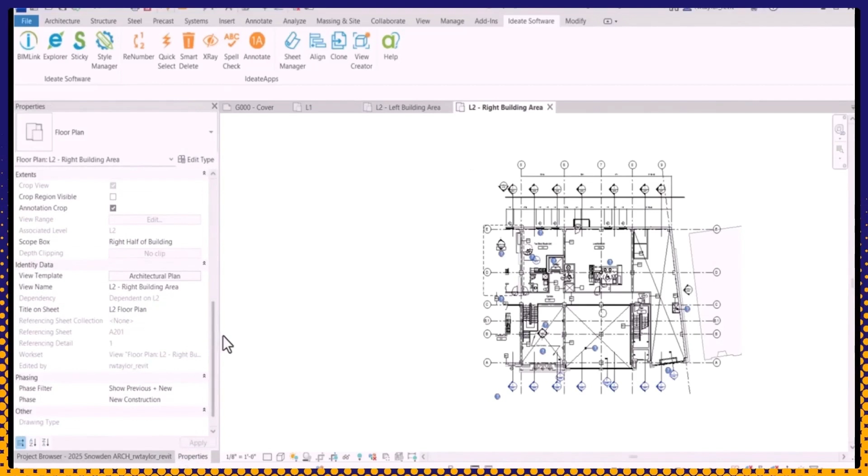You can create dependent views to match existing dependencies. So you can select the existing level and then apply the zones to other levels, and the tool will copy those settings across those levels. It'll also give you a preview of what it will look like before you proceed. So the tool adds scope boxes and applies it to the floor plan views that you can see in the project browser.

The sheet manager is like Ideate Explorer. It's a tool that allows you to view all the sheets and views in your model and allows you to also perform actions on them, like creating new sheets or copying legends and views and schedules across sheets. In this example, we are creating a new sheet and immediately updating the sheet number and sheet name. After that sheet is created, I can place views directly on the sheet using Sheet Manager.

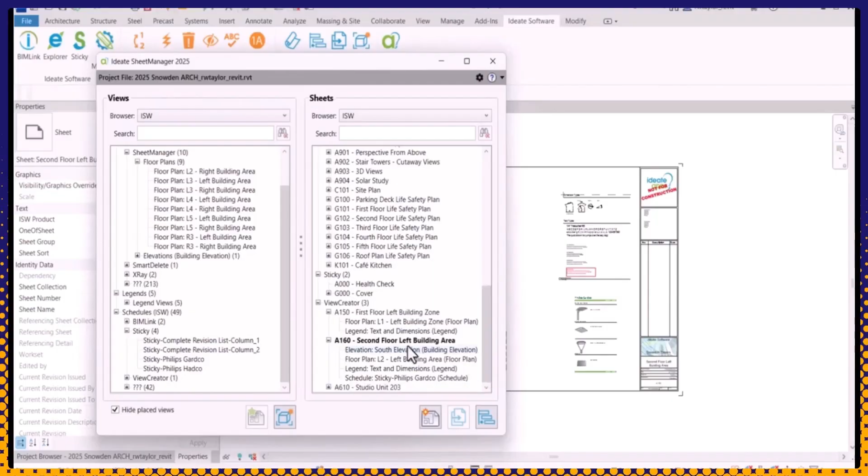You can also drag and drop views from one sheet to another. When you open the sheet, you can move the viewports around as needed. You can also copy legends and paste them on multiple sheets. You can use the clone tool to duplicate sheets, and the tool allows you to swap the views in the original sheet for new views on the new sheet.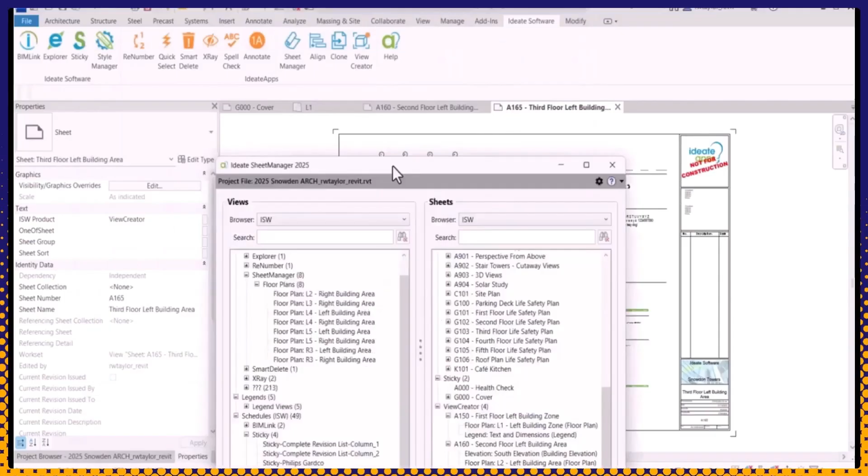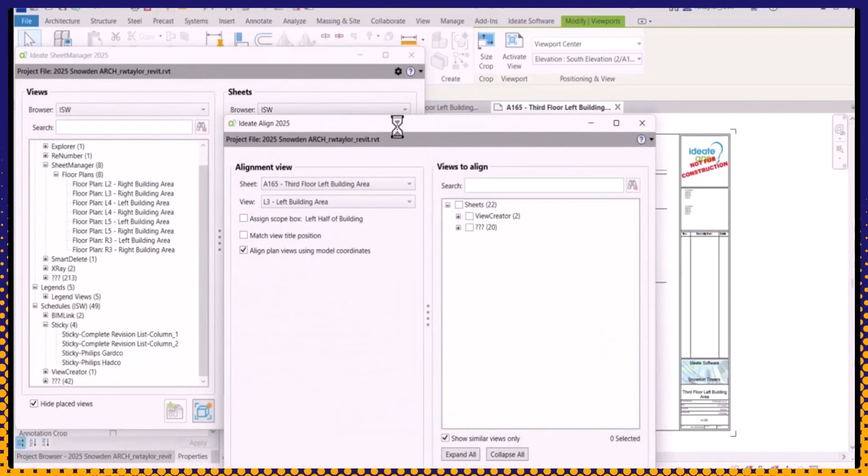So here are the two sheets, and they are aligned because the views have been swapped, but the locations are in the same spot. Let's say you want to move the locations of the views on the sheet and the title positioning across sheets. In this example, I'm going to move the viewports as well as the titles, so they are different on the two sheets. On opening Align, you can select the base view or alignment view, and then the target view, which is the new sheet that we created. You can now see that the updated position of the view is visible on the screen.

With View Creator, you can batch create multiple view types in your project, including multiple 3D views at once using view templates, levels, or scope boxes. Creating 3D views manually in Revit can be a slow, repetitive task, especially when you need to adjust view ranges or prepare views for export, like for NWC files. So with Ideate, you'll save significant time setting up 3D views.

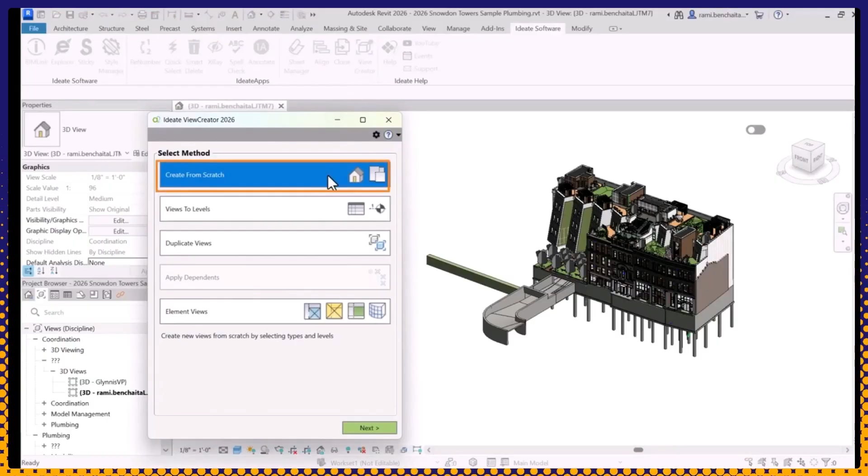Let's take a look at how Ideate View Creator simplifies the creation of 3D views. What used to be a time-consuming manual task is now streamlined into a batch process. You can generate multiple 3D views at once using a combination of view templates, levels, and scope boxes, all while applying smart naming rules and optional sheet placement.

Whether you need 3D views for coordination, visualization, or exporting NWC files, this feature will dramatically improve speed and maintain consistency across all your projects. As you can see in this example, we've created multiple views and placed them on sheets in a fraction of the time it would take otherwise.

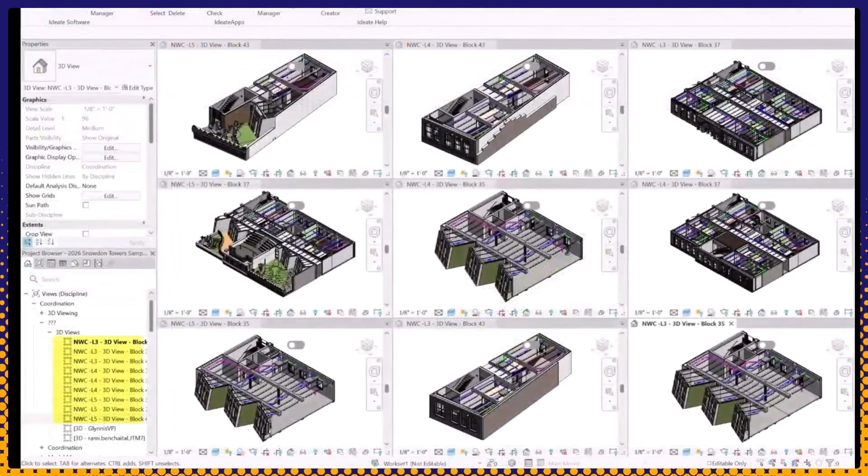View Creator can also generate area plans using the elements-based views method. Creating area plans in native Revit typically involves several manual steps, defining schemes, selecting levels, and placing views one at a time. But now with View Creator, you can batch create area plan views automatically based on predefined settings.

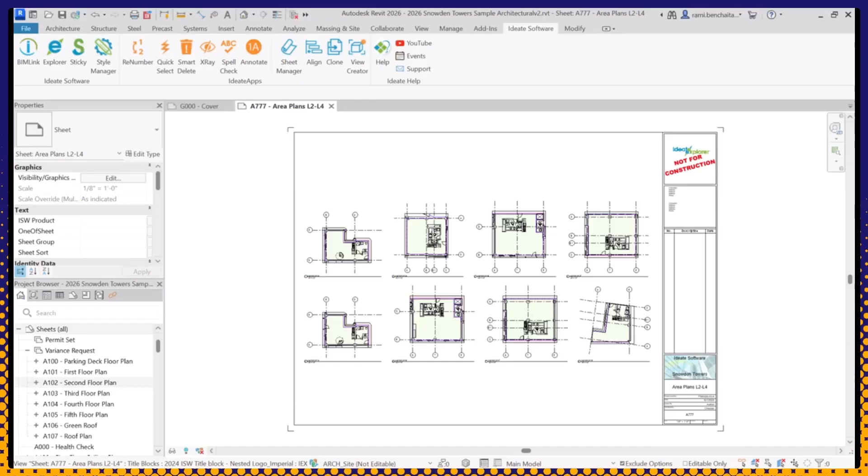You can choose to place all the generated views on a single sheet or have each area view placed on its own sheet. View Creator is smart enough to auto-arrange views within the white space of the title block, minimizing the need for manual adjustments.

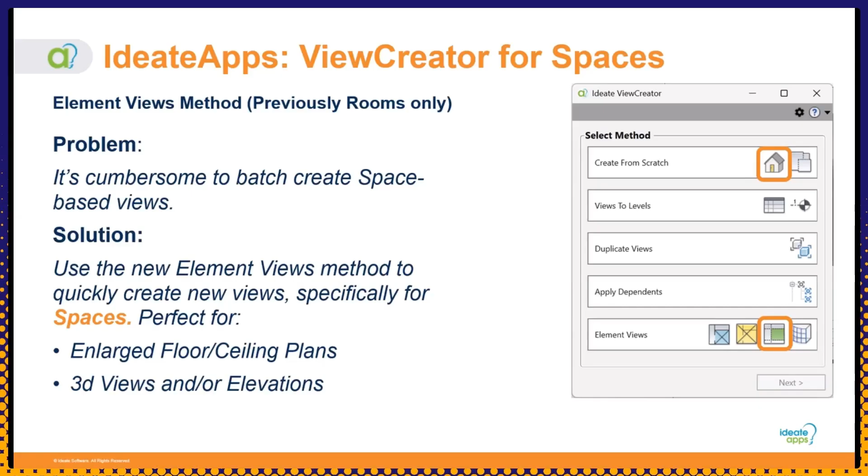And building on that, View Creator also supports spaces, a valuable workflow for MEP teams. You can also clone an existing sheet layout so each new view is placed consistently based on your template. Whether you're generating 3D views, enlarged floor plans, ceiling plans, or even elevations, you can quickly create and place views to selected spaces.

With Ideate View Creator's element-based views method, you can now create dedicated views for individual curtain wall panels as well, saving you valuable time on facade documentation. This new feature automatically generates elevation views for curtain walls. It also applies the correct view types and places them neatly on sheets, making the documentation process much more efficient and consistent.

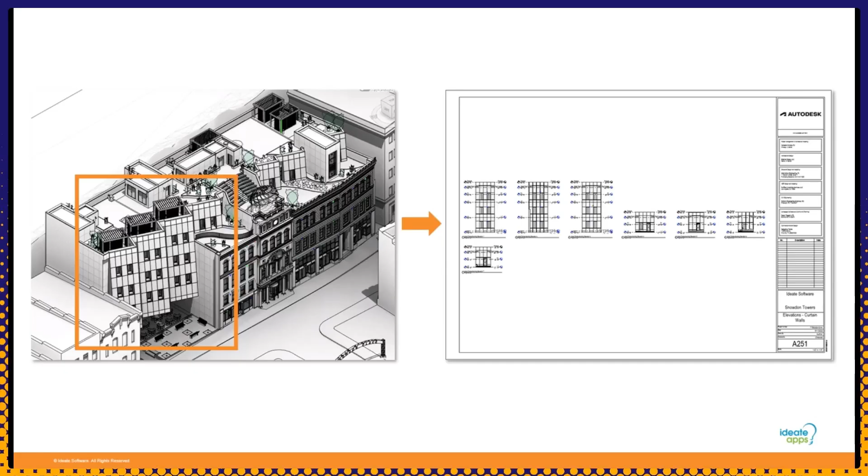Let's talk about another really helpful tool in this suite, which is the Align tool. Now, Ideate Align supports view alignment across linked models. This is a huge benefit for large multidisciplinary projects. You can now select a reference view from a linked model, so for example, an architectural view placed on a sheet, and then align views and titles in your own model to match that reference precisely.

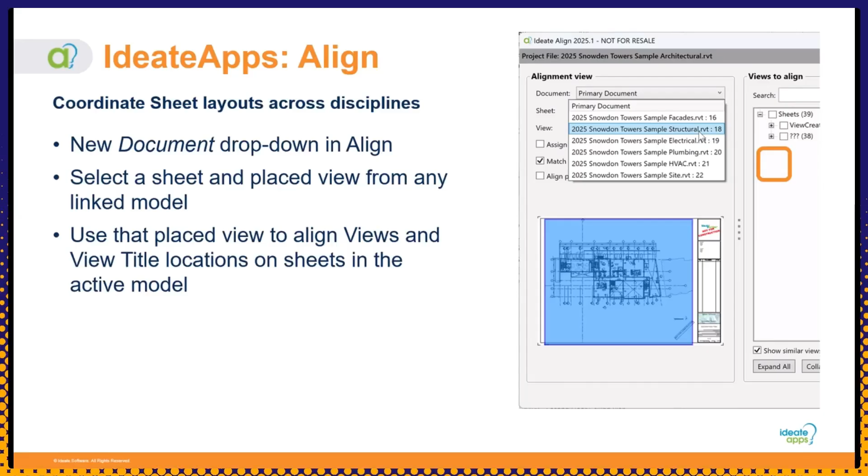This is especially valuable when multiple teams need to coordinate view placements across disciplines, ensuring that architectural, electrical, RCP, and enlarged plans are visually aligned. It's not just about aesthetics, it also improves the document clarity and supports straight coordination.

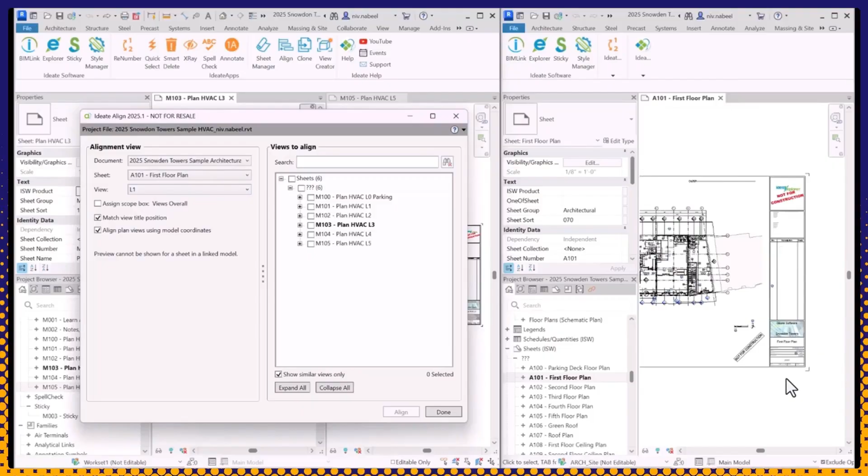And as I mentioned, Ideate Align supports view positioning from linked files. This means that you can seamlessly align your views and view title positioning on sheets based on position information from linked files. If you're an HVAC consultant, a part of the core and shell team, or an interior designer working in separate models, you can now easily align your views and view title position to a base model.

With position data set in the base model, you can easily align multiple sheets in your model, as in the example shown here, ensuring accuracy and consistency in your project documentation process.

Let's talk about tagging, and specifically the Ideate Apps tool called Annotate, used for tagging. Manually tagging elements in Revit is a time-consuming and error-prone process. I'm sure most of you are aware of that. With Annotate Tag, you can automatically tag elements using customizable rules, and these rules will select elements to tag based on their parameter values and assign the appropriate tag family to use and determine tag positioning.

The rule here is to tag all rooms whose area is larger than 70 square feet and are only in phase 2. In addition to these filters, you can also choose where the tag appears, whether it is in the centroid of the room or in the true center of the room. There's no nuance with Revit tags, so you can't control much with the native Revit tagging feature. With Ideate tagging, you can actually set up rules and control the position, which is really helpful.

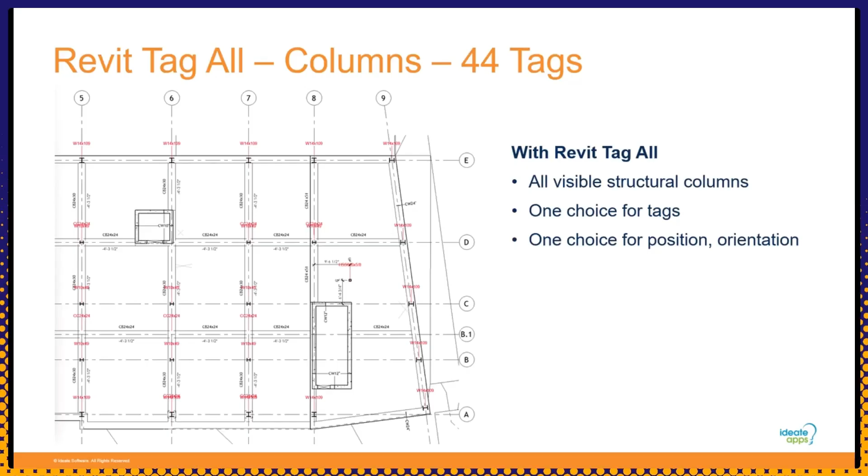If you use Revit's tag all for all elements, the tags go on top of each other and there's no way to fine tune the tagging. So in this case, you can see that you have 44 tags when you use Revit's tag all feature. But with Ideate tagging, you can build rules and have the tool tag elements in a very specific manner, allowing you more control than Revit's built-in tool.

In this view, we are going to use the ignore small rooms rule, and you can see that the tool selects all the rooms that match the criteria. You can choose the option that allows you to tag rooms in all the open views as well. And that will tag rooms in the 3 open views that you see here on your screen.

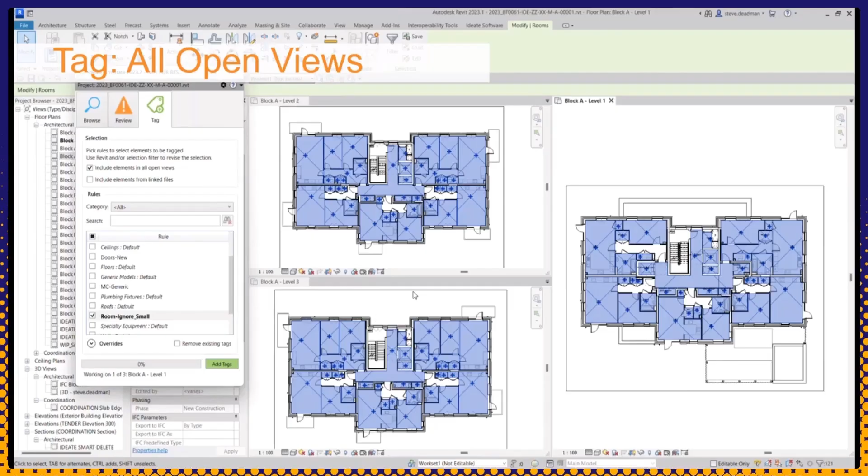Another example of using tagging is when you are using linked models. Let's say a core and shell model and a linked ID model. You can add tags for rooms in all open views and rooms across all linked models to save time.